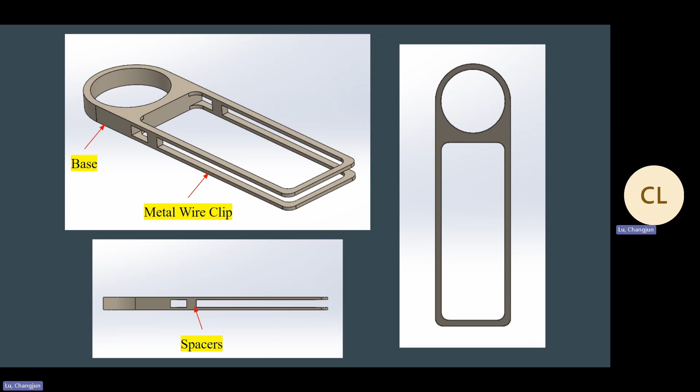Again, the areas I'll be improving on are the metal wire clips. So here's the proposed design solution. It involves two silicone attachments, one for each wire on the tool. The hooks on the silicone attachment wrap around the spacer, connecting the two wires together.

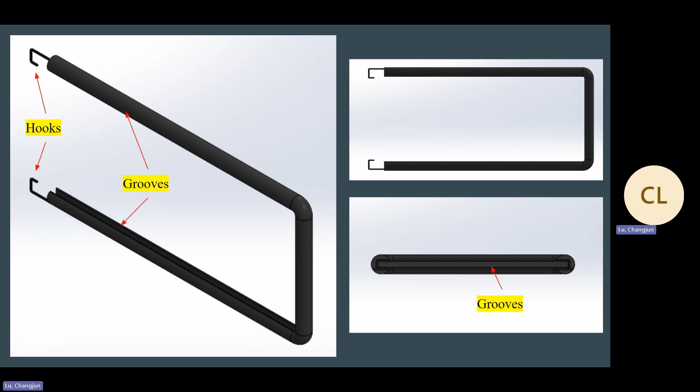This is used to prevent the silicone from sliding off the tool when the user is using it to modify their keyboard. The rest of the silicone attachment has grooves for the wire to fit into, preventing any sliding between the silicone and the metal wire.

With that, the design is implemented onto the tool and can then be used for its designated purpose. The wrap clips onto the spacers between the two wire clips, and the rest of the wire clips fit into the grooves on the wrap.

The hooks on the wrap are made of the same material as the wrap itself, so during the tool's usage, the hook is able to elongate as the wire clips grip onto the keycaps and key switches. When it's time to clean the tool, the silicone comes off easily by first removing the hooks from the spacers, then pulling on the hooks to remove the metal wires from the silicone grooves.

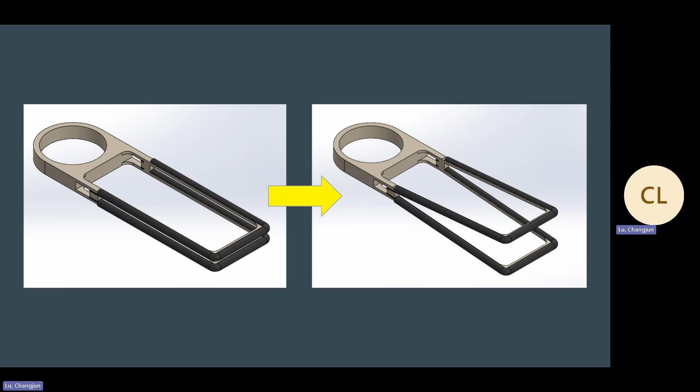As for the materials used, the wrap only uses one: silicone rubber. Silicone rubber is used because of its resistance to weathering, chemicals, and UV radiation. It is also designed to be durable, flexible, and hygienic.

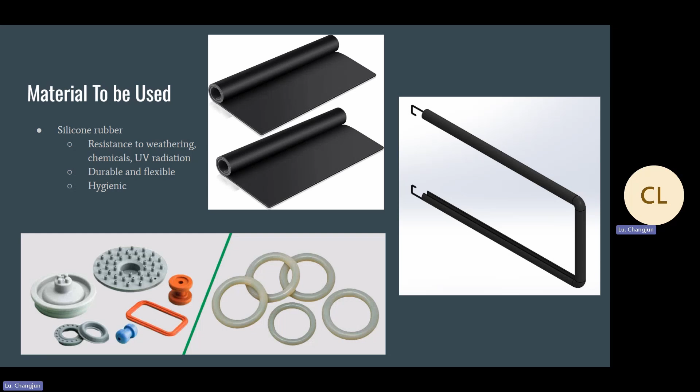It is hygienic due to its non-porous nature, which makes it resistant to bacterial buildup, and because of that, it is also non-toxic, water repellent, and recyclable.

For the manufacturing process, vulcanization is used to produce the raw materials for silicone rubber. This is done by adding curing agents to raw silicone compound and heating it to create a cross-linked network of polymer chains. Curing agents are used to improve specific properties of silicone rubber, such as durability, flexibility, and color.

The standard process may involve mixing, molding, curing, and finishing. Mixing: raw materials are mixed together to create the base material for the product. For molding, the mixed material is then poured into molds to create the desired shape of the product, and this can be done in a variety of methods such as injection molding and compression molding.

Injection molding is injecting liquid silicone rubber into a mold cavity under high pressure. Compression molding is placing a pre-measured amount of uncured silicone rubber into an open cavity and then closing it with a hydraulic press. The heat and pressure applied causes the material to cure and take the shape of the mold.

During curing, the material is cured or hardened by exposing it to heat or chemicals. In finishing, the product is then removed from the mold and excess material is trimmed off, polished, or coated. A second vulcanization process may be needed to further cross-link the polymer chains to improve mechanical properties like tensile strength, elasticity, and durability. It may also improve the performance and reliability of silicone rubber products.

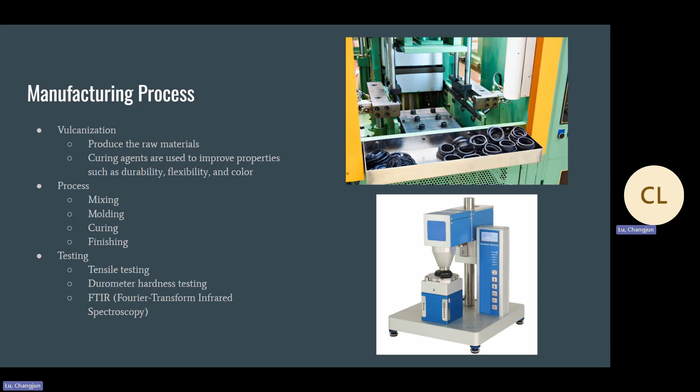And finally, here are the advantages and disadvantages of the design solution. The advantage is that it attaches to the keycap pullers, which means they can be taken off easily. It avoids scratching the keycaps when using the puller tool, as the wire keycap pullers only apply force at the bottom edges of the keycap, and the twisting motion may scratch the base of the keyboard along with the bottom edges of the keycaps. They can remove multiple keys safely.

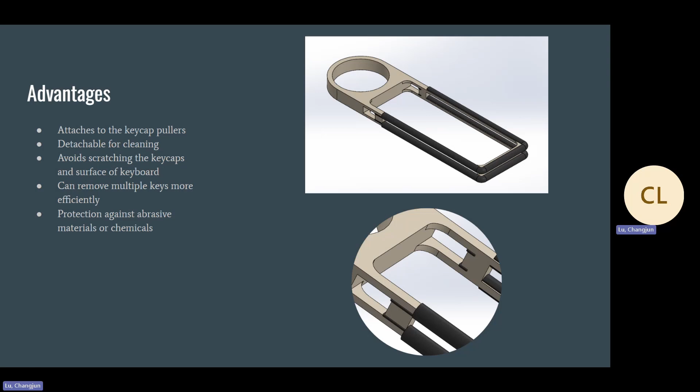Abrasive materials or chemicals commonly used to clean the keycap pullers during regular maintenance can also damage the tool, and the silicone cover acts as a protection layer against these factors and preserves the tool.

Now for the disadvantages. The design idea is mostly for wire keycap pullers, thus it is more expensive and costly, as wire keycap pullers are slightly more expensive than plastic alternatives, shown here. The silicone elastomers are also a premium product with a premium price tag when compared to other rubber materials, but this is often offset by improvements in uptime and quality control.

Bringing it back to the plastic keycap pullers, plastic keycap pullers are cheaper and easier to use. It is a simple push and pull procedure versus bending the wire at a slight angle to position the wire under the keycap and then twisting the handle and pulling the keycaps out.

However, the plastic tool is not as durable and is sometimes stiffer than a wire tool, which may cause damage to the material, paint, or coating of some keycaps more than wire ones. It is also less efficient as it only removes one key at a time rather than multiple, which can easily cause fatigue.